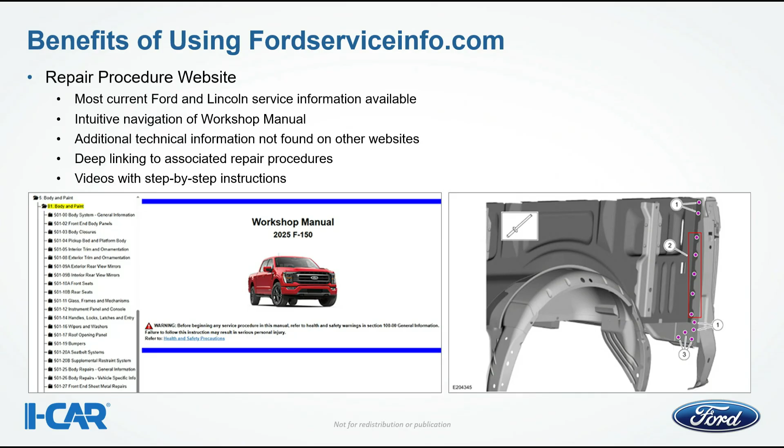We have a lot of great information that's free over the FordCrashParts.com website, including position statements which are newly released. You really want to check these out. My magazine is called On Target Newsletter, and we write this to the collision industry as a quarterly summary of what's going on at Ford within our repair structure.

We're also going to talk a little bit about some repairability training videos that are on FordCrashParts.com, including a bedside repair replacement, as well as transit body side replacement. So good stuff there. And of course, other Ford-approved sealers, paint systems, and other miscellaneous information.

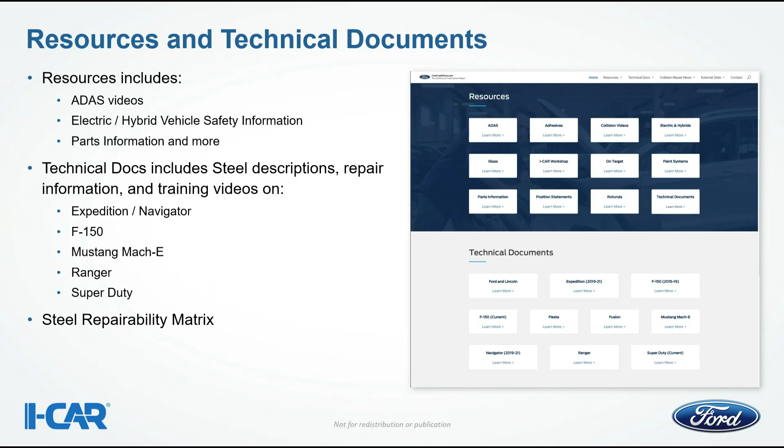So going into it, we have a lot of great technical documents that are available: steel descriptions, repair info on all these various different vehicles you see. We're also going to cover the steel repairability matrix as well.

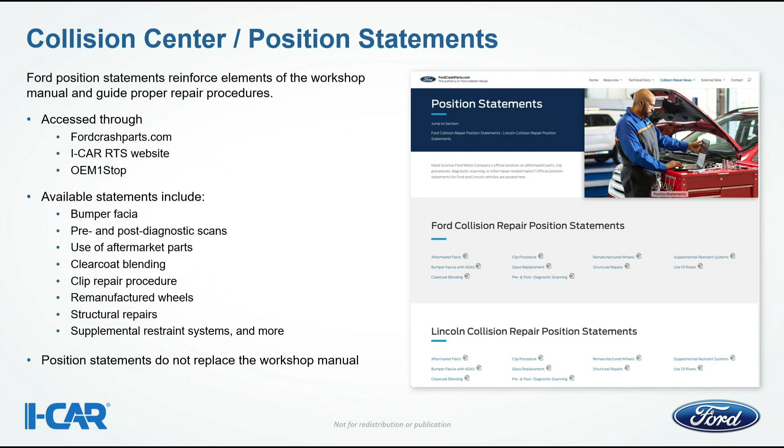Some other information you can gather from this - I'm not going to read the position statements, but you can see them listed there. And of course, FordCrashParts.com or the I-CAR RTS website or OEM One Stop.

Here's the On Target newsletter. This is kind of a sit down with Jerry and the collision team, and we talk a lot about the different things that are current in the industry, new procedures that have come, and we also focus on particular vehicles of interest to you as you're repairing our fleet of vehicles through the Ford family.

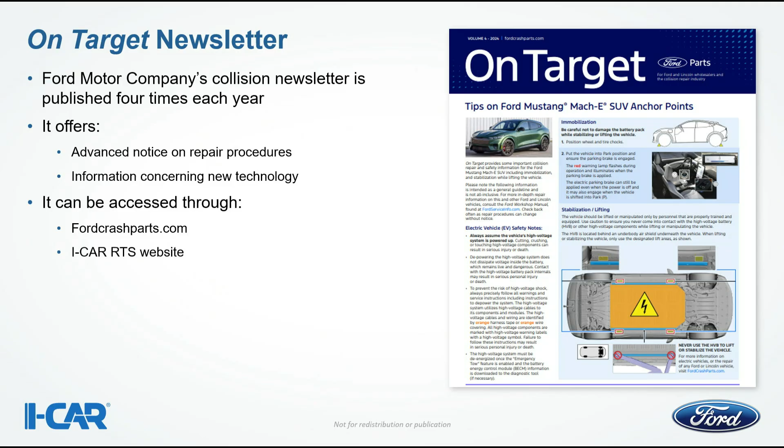Foams and sealers are documented within the repair procedures, and you can see the various ones that are approved, including Fusor, 3M, Motorcraft, and SEM. Within the service procedures, we document where to apply those sealers and restore them as per production level and intent.

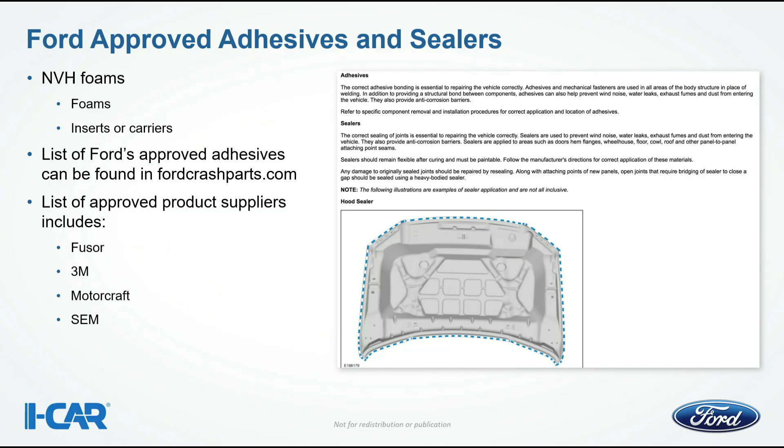So let's get into body construction, the meat and potatoes of the day. You guys liking this? Is this good?

In every factory workshop manual, we have a summary page that's specific to the vehicle. Documented within that are exploded diagrams of the structure, showing where the different materials are within that structure by that particular vehicle family, and where they're located within the structure in the different models.

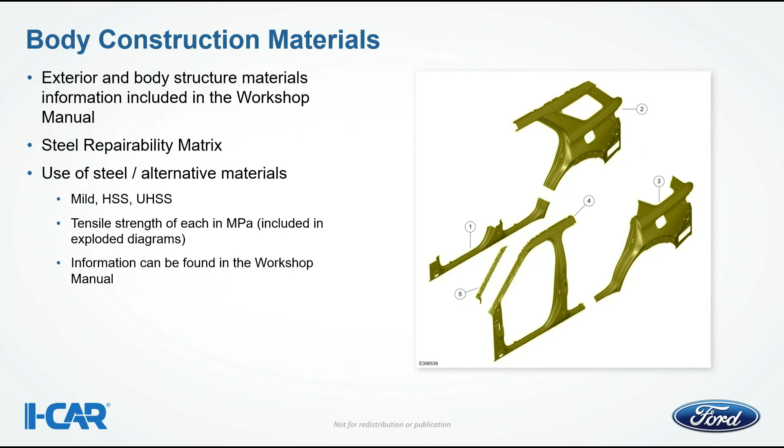So I just want to call out the steel repairability matrix. That's one of the documents that I think is probably one of the most underutilized, and there's so much information that helps you make those repair and replace decisions. You really need to get familiar with that document because it's going to help you answer so many questions. I'm going to pull that up in just a minute, but that was done in conjunction with the American Iron and Steel Institute, Mittal Steel, brands like GM, Audi. We had a number of teams involved, and we worked very closely with the I-CAR team to develop that document.

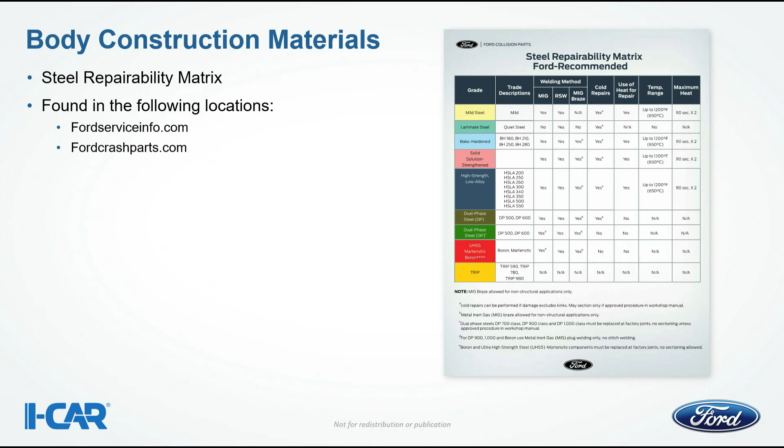So as an example, the steel repairability matrix covers the various families of steels, and in particular what you can do with them, preferred welding methods, preferred methods if you're going to use heat during the repair, and there are general guidelines on the bottom. Remember that the factory workshop manual trumps any information you see out in the field, even if offered by us. The workshop manual is the key and the gospel.

So this is a question you get a lot, Scott. Partial replacement. The key to remember at Ford Motor Company is if it's a structural repair, we document that within the factory workshop manual procedures. We give cut lines where necessary or at factory joints. Basically, if you're not receiving any, or you cannot find any type of documented procedure or sectioning option, the part is to be replaced as you receive it as a service part at the factory joints in the factory manner.

Now, exterior skin, we leave it to your judgment as the technician to perform that replacement and section according to your repair plan, your experience, your level of what is the least invasive repair judgment, and of course, you must stay within 50 millimeters away from any hinge points or structural points of strikers.

You get that a lot, don't you? We really do. And a lot of times they see the cut lines here, which are very common ones in the manual, and they think that's where you only can put it. But that's where that line is in the procedures, and it really does give you that flexibility. A lot of times those cut lines are going to be for accessing hidden reinforcements and things like that. So it's a good place to put it if that works for the damage you have, but you have other options, and that's all in that workshop manual. Well said. Very well said.

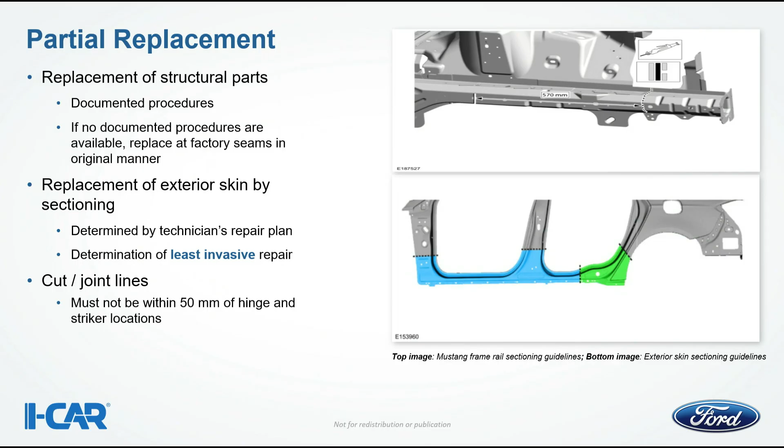And remember, it's according to the technician's judgment as far as the least invasive repair. Many of the cut lines we have on exterior skin are guidelines or suggested cut lines. They are not mandatory. So just remember that.

So let's go into a little bit discussing that. We do recognize that cost-effective repairs are the least invasive repairs. We also try to do so in the effort to repair the vehicle properly, on time, and with the least invasive and the least parts possible. So going into it,

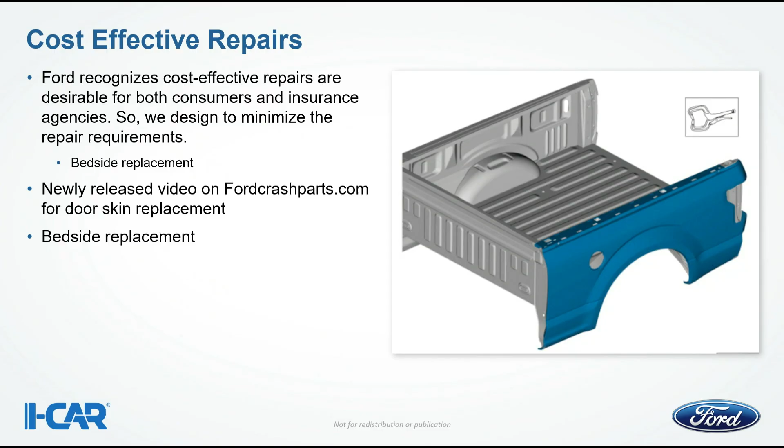Let's talk aluminum. You ready to talk aluminum for a minute? We always talk aluminum. I'm always ready.

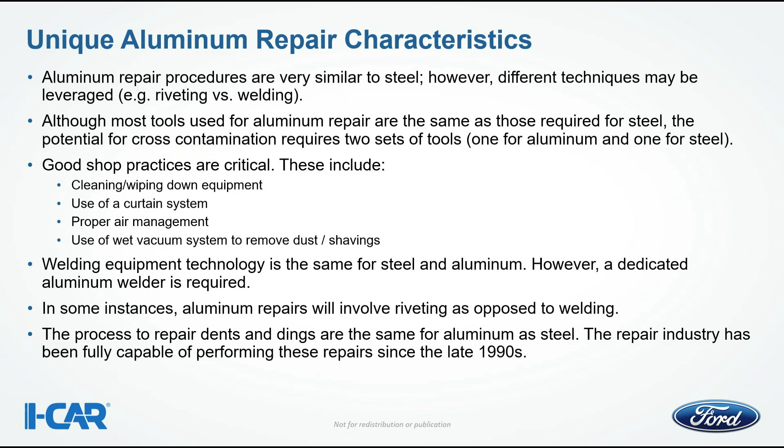So I'm going to move on a little bit. This is the real meat and potatoes here. Going into the F-150, we've got a lot of great options, and I'm going to cover this in a little bit of detail. We really, at Ford, believe we are truly best in class for the ability to section frames in the least invasive manner possible.

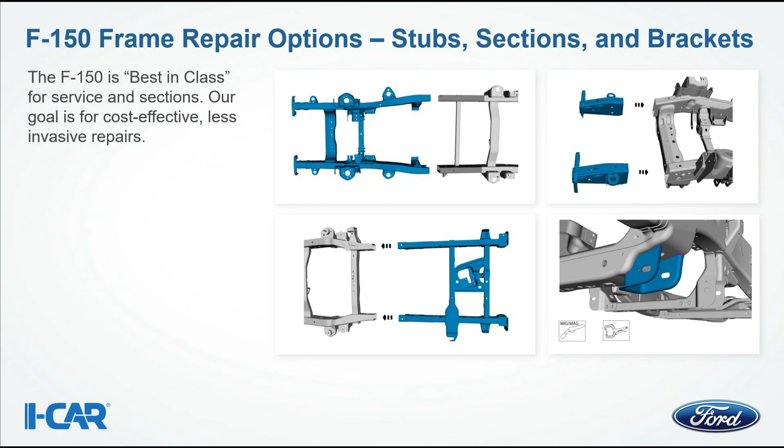When you look at that, on the upper left, the long forward frame section, next to that to the right, the short frame stub sections, the bottom left, the rear main full section, and then including things like lower control arm brackets, 4x4 brackets. There is so much stuff available to repair this frame. This is a part listing and just a quick summary overview of the different brackets that are available and sections available to service a typical F-150 frame.

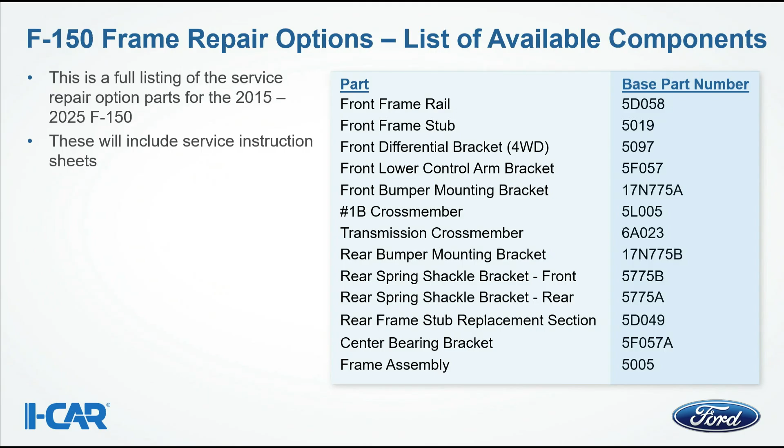You look at this, it's paramount in the industry. And this also applies toward the Expedition Navigator family, with the exception of its rear section being unique. But there's a lot of great stuff within this document you can see here. Please remember that as you're estimating one of these vehicles, keep in mind there's a lot of ways you can repair the frame versus just replacing it.

This is one we see a lot of questions on, because a wheel gets hit, hits a curb, goes in the ditch and hits a rock or a stump, and it just tears that out. To replace the entire frame would be extremely intrusive, where instead we can grind that bracket off, replace it, weld the new one on, and it's a much less intrusive repair. It's a lot better for everybody involved, and it's great that you have all those options.

Yeah, it's really dynamic. I think when you look at the frame repair, we carry that through not only in the F-150 and Expedition Navigator, but into the Super Duty, and I'll show you that in just a minute. But then you look at Ranger, you look at Bronco, and we've got similar options on the smaller frames. So we've got a lot of great stuff.

So let's talk apron tube. A lot of other vehicles are very complex in the forward aprons, the forward portion of the vehicle, with many stampings and many parts involved. We have developed a very, very simple, very easy to repair front end here.

The apron tube concept, the part you see in blue, simply rivets to the side of the cowl at the hinge pillar. On the steel vehicle that was before this, that apron tube went in underneath the hinge pillar, which was the point the door hinge is bolted to. The problem is that in order to gain access to the spot welds at that time, you had to drop the instrument panel down. So this repair, all the fasteners are external, rivet-bonded to the side of the cowl. Think of it as a tongue and groove type of setup. Hemlock rivets or pop rivets replace the original flow drill screws in this location.

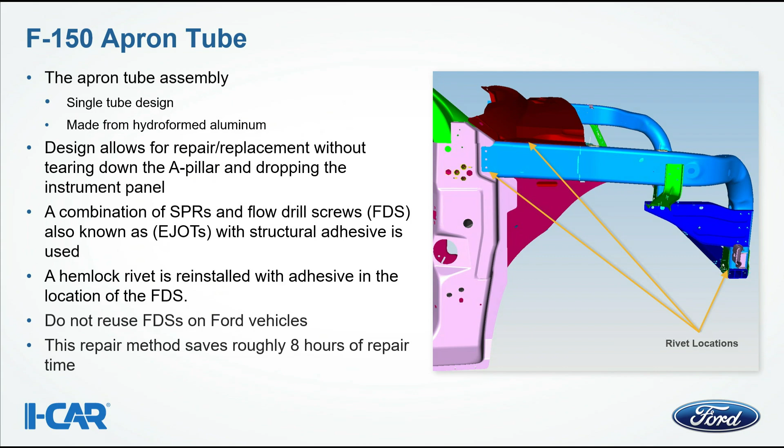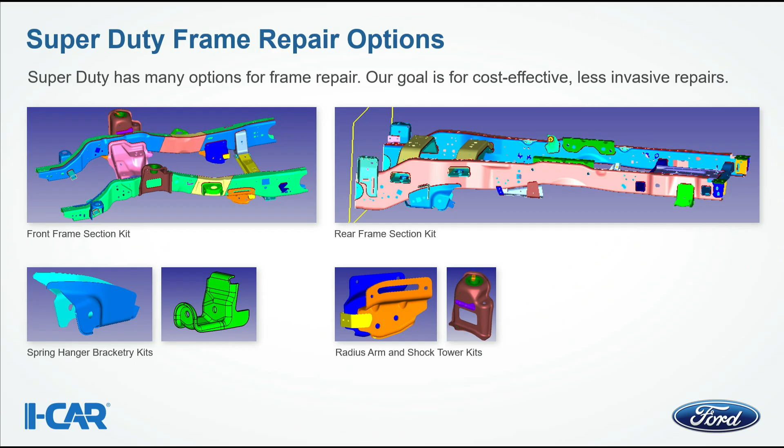Now what I'm going to do is compare and contrast for you. This is F-150 and Expedition Navigator. Notice the single tube, made of hydroformed aluminum. When you go to the Super Duty, I'll go through the frame really quick first. Super Duty has similar options for frame repair that we do for F-150: long front frame section kit, rear frame section kit. Look at the bracketry. We have so much stuff that's available to repair these trucks. And the idea behind it, again, is least invasive repair.

But going back to the apron tubes for a second on the body, the unibody structure - notice that this uses a twin tube design. Because of the larger engines, the intercooler packages, and the cooling packs on the Super Duties, we go with a twin tube design, but it actually goes to HSLA steel. This is kept isolated from the cowl and other areas of the truck by a powder coating, so when you look at the service part, it's going to come to you in a black powder coat. Those are attached the same way, with Hemlock rivets and structural adhesive, as you do on the F-150. All fasteners are external, so again, same concept. You're looking at a single tube on F-150 Exped Nav versus a dual tube on the Super Duty.

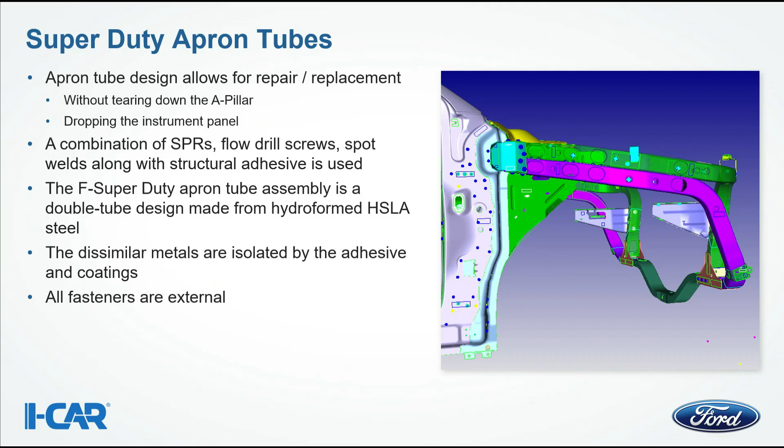And by the way, the engineer who designed this - we gave him a challenge and said, can you do this in a really simple manner? Guess what his name is? You talk about a cool name, you thought Scott Van Huel was a cool name? This guy's name is Dragan Stojkovic. He is a very talented engineer, over 22 years at Ford Motor Company, a good friend of mine. He designed this little apron tube that you see here, and that concept has gone through a great number of other Ford vehicles. So I always say, you did a really great thing there, buddy.

He really did. So moving on to common repairs between the F-Series - of course between F-150 and Super Duty, and this also applies to Exped Nav - cab cross members can be sectioned. You can section them according to the repair hit. Of course we talked earlier, Scott, about sectioning the inner rocker, particularly the procedure for if a running board stud gets ripped out or damaged on the inner rocker.

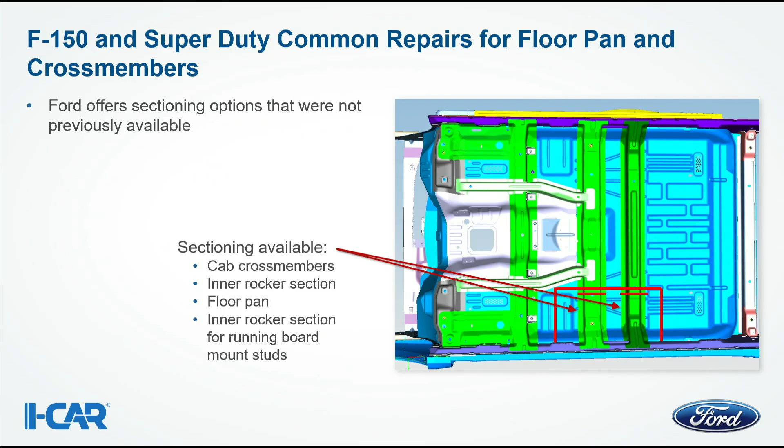We also offer floor pan sectioning, and of course the torque boxes are repairable as well. All of these options made the F-150 at the same insurance ratings as the outgoing steel truck from 2014 to 2015. That's why we were able to keep the truck still affordable and easy to repair.

Now going to the side here, you notice the green part on the bottom of the picture. That's the rocker panel extrusion, a complex extrusion with a reinforcement vane in an X design. Some people in the industry think you can repair that. Do not listen to them. Listen to Ford Motor Company, the workshop manual, and I-CAR. There are false people out there who don't know what they're talking about saying that part can be sectioned. How you could section a complex extrusion is beyond me.

But we do offer sectioning options for other areas. For instance, the roof rail tube above the B-pillar can be sectioned. The part behind the B-pillar can be sectioned too, since that's a simple stamping. When you look at the options to repair this truck, we really offer a lot of dynamic ways to repair it in a simple, very least invasive manner.

And these things also apply to the Expedition Navigator family as well. So I'm going through a lot really quick - you guys good with this? Are you comfortable where we're at?

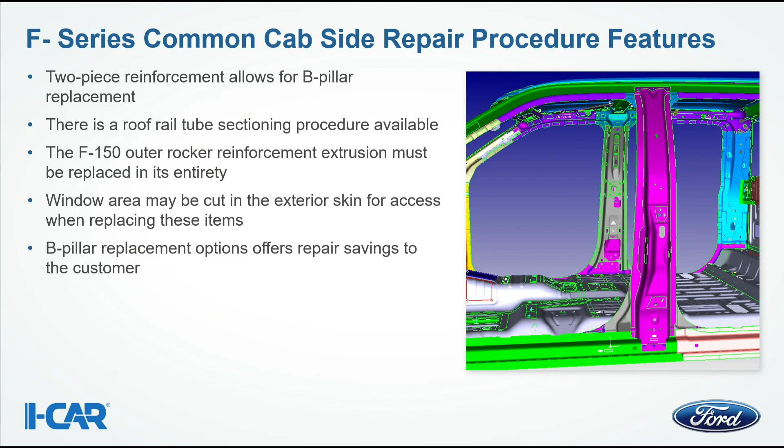Okay, so rivets - your favorite. You ready? Yeah, I'm ready. I'm ready. All right.

Rivets have to be put in the factory locations, the correct rivets. You can see here the range of where the rivets go. These rivets are developed for strength depending on the heat treatment of the aluminum and if there's adhesive in the joint. Each rivet is driven in a unique way based on location. Remember that a typical F-Series truck utilizes possibly up to 67 different styles of rivets. Those are all SPRs, but they're different specs of rivets around the structure. When you're repairing this vehicle, be sure you follow the workshop manual procedures that dictate where those rivets go and what mandrel drives the rivet.

When you look at an SPR rivet - and this is the science of it for a second - it splays out a lot like the roots of your teeth within your gums. If you don't properly set that rivet correctly, you can either overset it and damage the material below it, or underset it, making a very weak joint. Either way, it's a weak and inferior joint. That's why we say utilize Ford Motor Company rivets only during these repairs. Do not, under any shape or form, deviate from that. Do not use aftermarket rivets, and do not use an incorrect mandrel to drive the rivets.

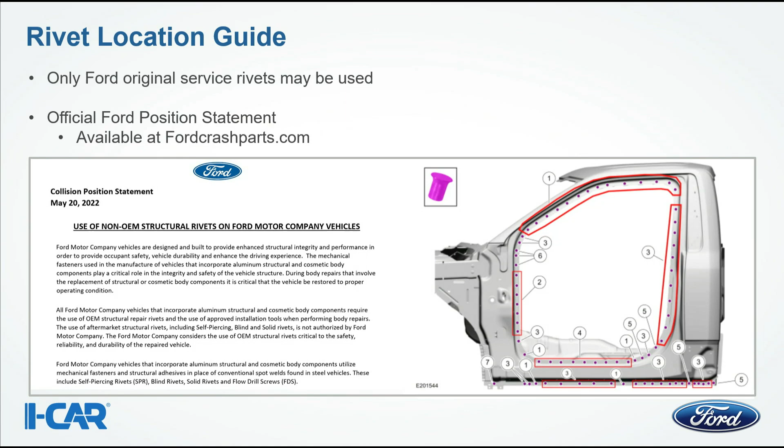Yeah, you covered it great, but I just wanted to point out this picture here is a great opportunity to make your map - color code it here, then take those same colors and map it out on the part you're putting on with dots in the locations, because you can see there's 3s, 6s, and 2s, and it's not the number of rivets, it's which one you're calling out. So if you map it out, when you're going in there you're not switching back and forth between mandrels, putting the wrong one in the wrong location. This is your roadmap - take this roadmap and put it right on the vehicle, and that way you're going to be most efficient and do it correctly.

The key is once that glue starts kicking, you're moving fast during the repair, especially if you're doing a complete body side, so you want to make sure you have your ducks in a row and the rivets set to go. And above all, I've heard guys even on YouTube saying you could put any rivet wherever you want, which is really scary. Especially when the length of them is just slightly different, and a lot of times, unless you have a micrometer, you won't even notice it.

So are we good with rivets? Can I calm down now? Yes, you can - your blood pressure can come down. It's good, it's good, I'm good.

So Mach-E, remember on vehicles like Mach-E and other BEV vehicles, we have emergency response guides on FordCollisionParts.com, FordCrashParts.com. You can look at response guides that talk about key safety features of the vehicle, where key wiring components are, and where other key components are within the structure. Follow the safe handling procedures within the guidelines of the workshop manual, and things should go very well. This is a good vehicle.

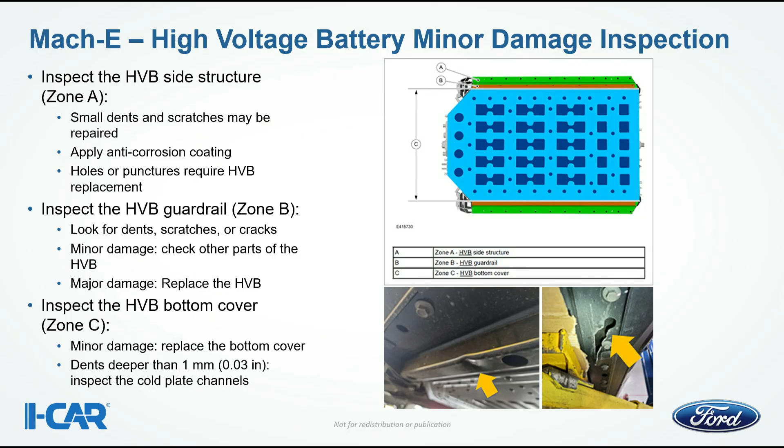Now moving on, Mach-E hoisting is pretty straightforward. There's a lot of training available through I-CAR as well as Ford, and you could go to the I-CAR website for that. And then let's go to Bronco.

How cool is this vehicle? I mean, I had a '69, loved that truck. I also had a '79, and looking at this truck, what a throwback to the old one.

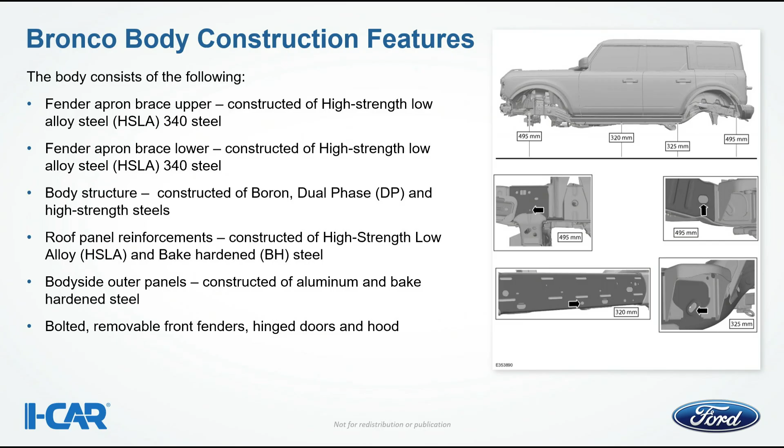This is an example I lifted directly from the factory workshop manual. Look at the overview of where the different materials are within the structure. This is a great overview that shows the structure in its overall design, but look at the exploded diagrams. All of this is in the factory Ford workshop manual information. I did not create this specifically for this presentation. This is what you have available to you when you repair our vehicle using our manuals.

And again, notice something similar, Scott? Apron tubes. When you look at the design of this, they chose to go with the same idea as the F-Series. You see the apron tube concepts.

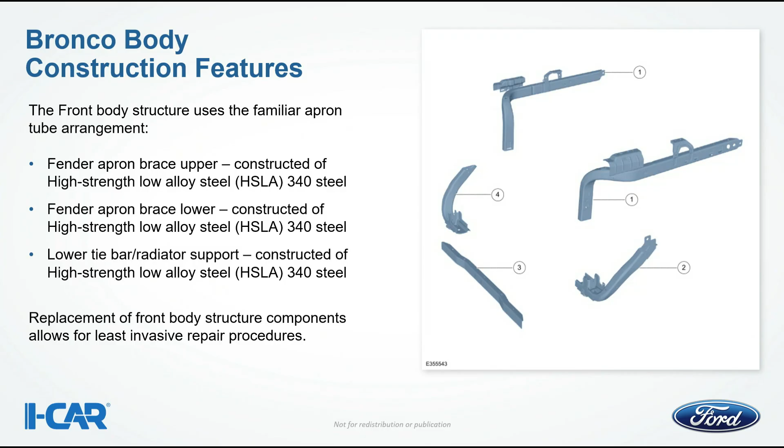I love having color graphics like this, because when you're looking at repair and replace decisions, you instantly can visually see where it's at and what you can and can't do, because you have that repairability matrix as well. When you marry those two up, all the information's there for you to make 99% of the decisions you need to make. There could be a one-off question, but a lot of that information is going to be answered. You can't just look at one procedure, you might have to look at three different things to put it all together. Ford really does a great job with all those internal links, because you might have 15 of them open by the time you're done, but it takes you to all the places you need to go.

As a technician from my earliest years, I'm just boggled by the hyperlinking. The hyperlinking is just one of the strongest things we do now, and it's stuff I could only dream of when I was a kid coming up in the business.

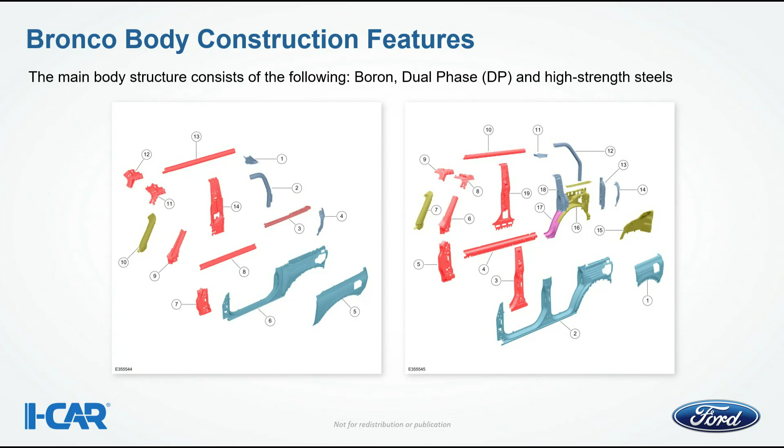Looking at this, the exploded diagrams came firsthand from experienced techs. They said, we know how to take it apart, we know how to separate the spot welds, we want to know where the material is within the structure. If you poll many body techs, that's the first thing they'll say: tell me where the steels and different materials are, and then I will go from there. We do offer specific procedures, but these exploded diagrams keep things very simple.

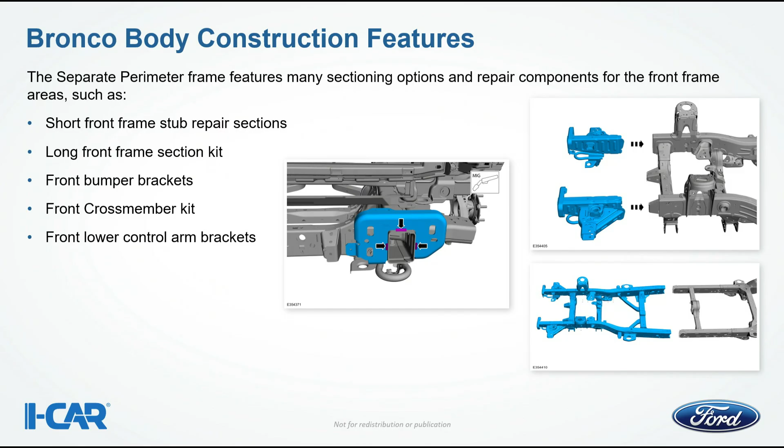We've offered repair sections for these vehicles that keep them very repairable in the least invasive manner. We also have a long rear frame section kit, even the rear cross member, as well as the Panhard bar and all the other suspension bracketry. Cool, cool stuff.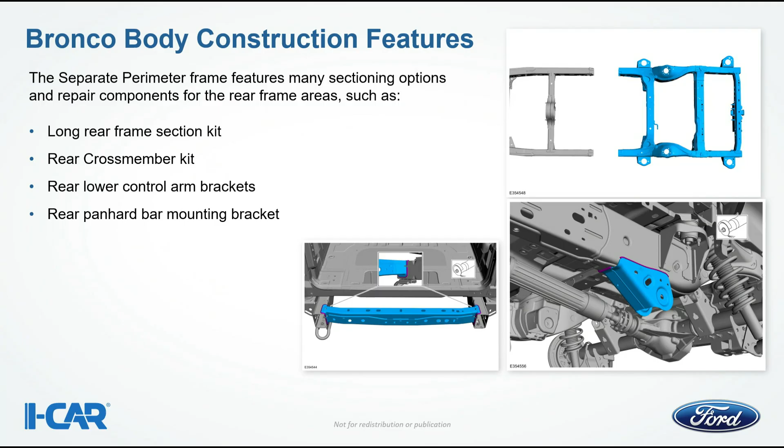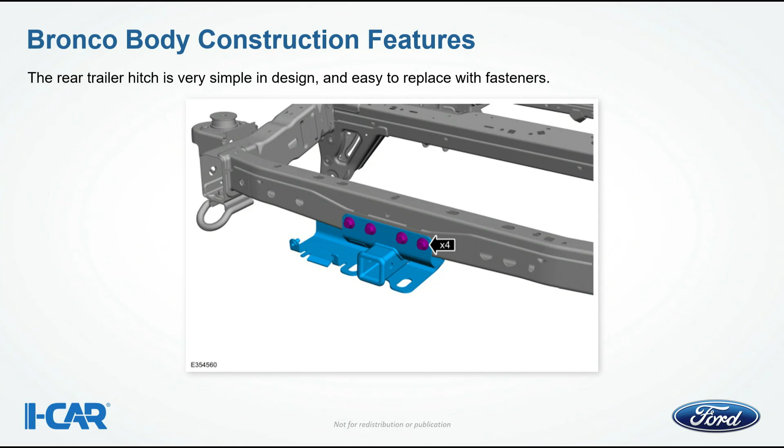Going into it, look at the trailer hitch. A few bolts, and you're off. Very, very easy to work with this vehicle. And again, I think it's a very robust vehicle. The frame is very heavy duty, very stiff. We've got multiple reinforcements and welded cross members that are through-pierced, welded on the inside as well as the outside. Very, very tough unit.

So why don't you talk for a while, because my throat's getting sore. I'm going to drink some more. I'll listen to you talk for a bit. How about it? Yeah, that sounds good.

We've done a lot of work over the years with Ford. The linking pins, the running board, we've got videos on that. We've got a lot of articles that point to that, because when we get questions in at RTS, it's not us coming up with it, we're going to the OEMs. You're bringing it to your engineers, and they're looking at things and approving different things. So the linking pin is kind of one of the most important things my team does.

When we were talking about EVs, we have a section on the website that is the hybrid and electric vehicle disable search. All we go through there is basically here's how you get to it in the OEM repair information. Because if you're going to disable that vehicle, you need everything in that document that's in the OEM information. So we give you that step-by-step on how to get to it. The ERGs are terrific, but as a repair facility you still need to be accessing the repair information, because the ERG is emergency and gives you a starting point, but you really need the OEM. It's just a high-level guideline, meant for when that vehicle's in a ditch and someone has to get out of it quickly. But I think we offer it as a good overview because there's a lot of good diagrams of where things are within that structure and where those components are located.

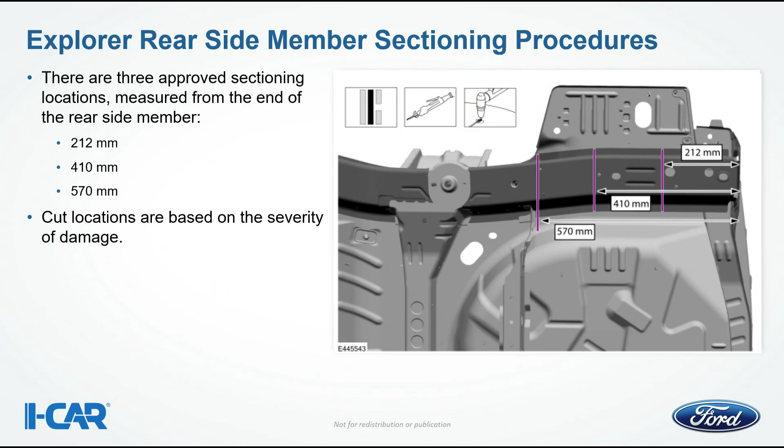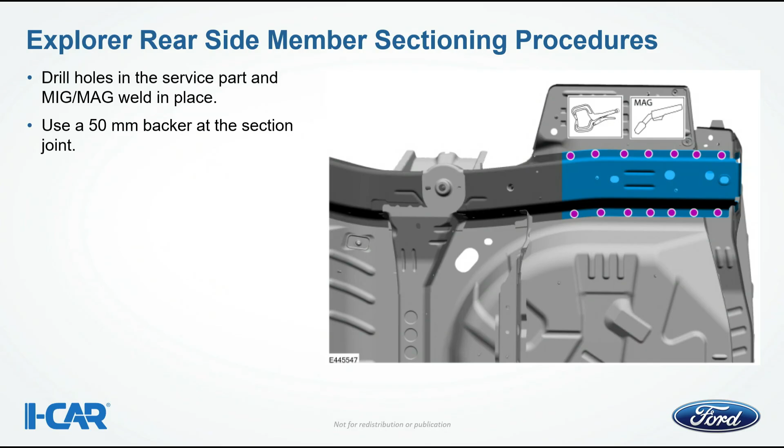You can see here this is actually lifted directly from the workshop manual procedure. We offer 212, 410, or 570 millimeters from the rear of the vehicle, and of course you can choose that according to the severity of the damage. The replacement section utilizes a 50 millimeter backer, done within the guidelines of the repair. You can see here the MIG plug welds that are documented for the new replacement section. So just check the workshop manual for this one.

Some really great stuff. Can I talk fixed glass? Of course. Going back in time, there's been numerous things that have happened. Very, very serious safety implications can occur with fixed glass. But I'm going to talk about my area of fixed glass, because I'm not the fastest at doing windshields. I can do them, but it's the structure around it that I'm working on. What we really have to direct you to do, and this is an important warning, kind of like the rivets discussion, is that shops unfortunately are bonding stationary structural glass to aftermarket refinish base coat, clear coat systems.

This absolutely, positively must not be done. Do not do that. When you're refinishing a windshield flange and you're down to bare metal, you've welded in, let's say, a new roof skin, etc., be absolutely sure that you properly prepare that substrate and apply an epoxy or a self-etching primer to that windshield bed urethane area.

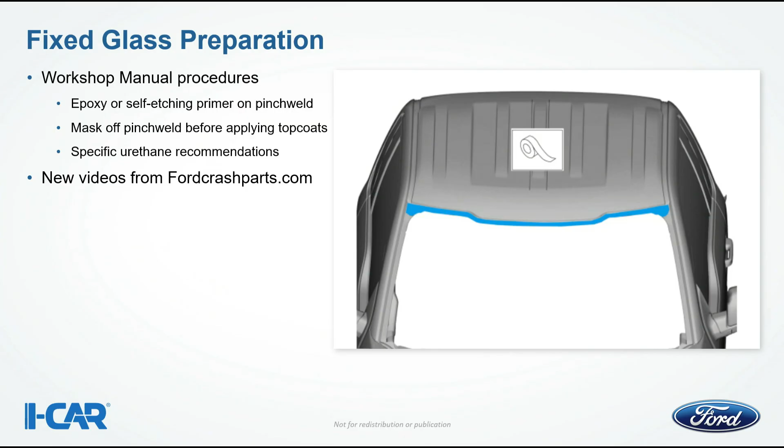Mask that off after it's dried, and you may apply your base coat, clear coat around the perimeter for when you put the windshield or stationary glass in the vehicle. The reason we want you to go to epoxy or self-etching primer is because it is the most bulletproof platform you have. The problem with base coat, clear coat in aftermarket refinish low bake products is it turns into an Oreo cookie. It does not allow you to bond that windshield correctly to the base parent metal.

OE high bake is a totally different chemistry. It is baked at extremely high temperatures, and anyone in the industry will attest when you get into a situation replacing a flange of any kind, be sure that you go to epoxy primer to ensure you're going to a safe substrate. I can't stress this enough.

There's been a huge, very high-profile case in the past, and one of the mess-ups on that job was they didn't put the windshield in that car correctly. And that could have been prevented. You know, do it right.

I think one of the things I always correlate with this is when we had raw plastic bumpers, and if you did not prepare it correctly, the paint would peel off, it would blow off going down the road. That's kind of the same thing happening here, where you don't have that adhesion, and the bumper issue is very obvious, but you're not going to see this typically until there's a problem, and all of a sudden the airbag timing could be interrupted.

And when you watch that collision energy on one of the crash test videos and you see the windshield look like ripples on a pond, that is structural and that is transferring energy, and you don't know what's going to happen to that energy, to that vehicle once that happens. And if all it does is pop off because it's not properly adhered, because again, it's not prepared correctly.

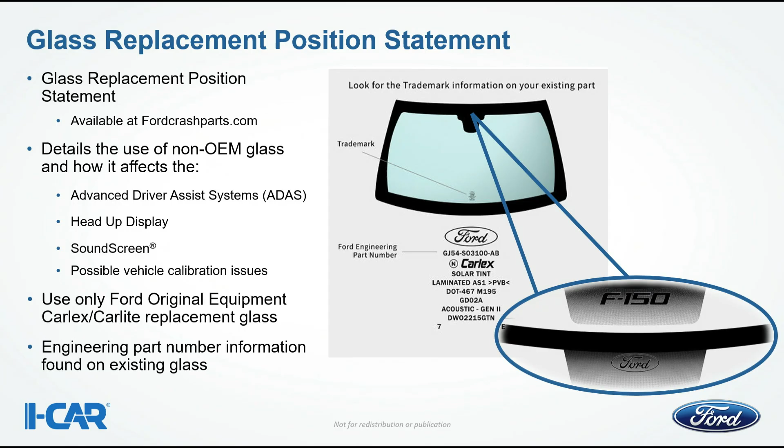Well said, well said. Our glass position statement, I'm not going to go into this in detail, but please check it out on FordCrashParts.com. It does cover some of the nuances with our glass. Again, I am not a glass expert, but I will say there's a lot of great info within that position statement.